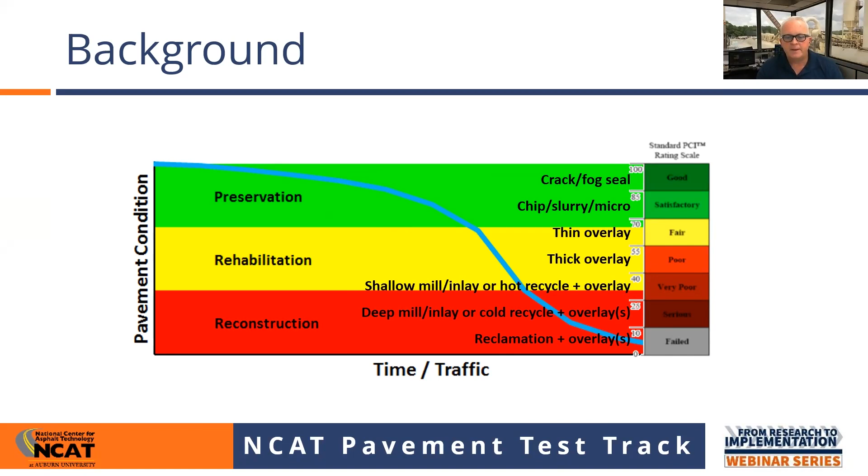And that's because that's the objective of the research we're doing. In many cases, when we're doing structural pavement test sections, sponsors want us to take them all the way out to failure. But in practice, what you want to do is catch pavements and keep them from falling too far down that curve, because the farther down you get, the more money you have to spend per mile or per square yard to maintain serviceability.

So when we talk about pavement preservation, really what you want to do is stay in the upper third to half of that curve. And the research we do is all about equipping you to select the alternatives so that you can achieve the lowest possible life cycle cost for your roadway network.

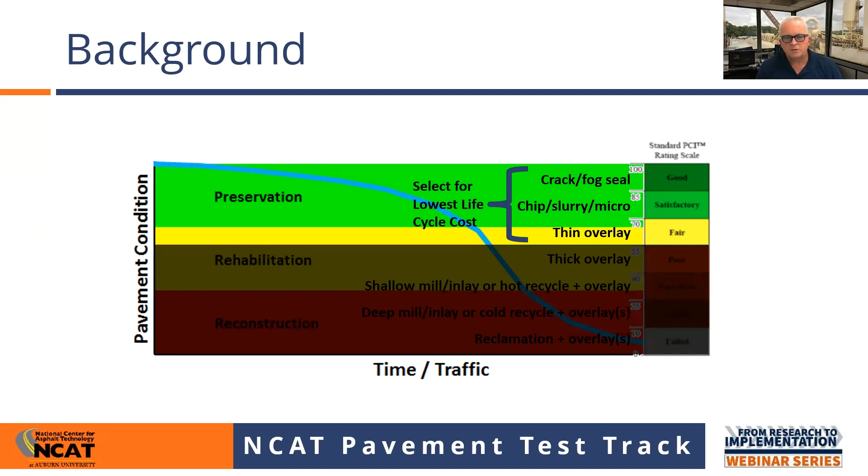So we always talk about safe and sustainable asphalt pavements at the lowest possible life cycle cost, and pavement preservation is a really important part of that.

So the need for this research, going back to 2010, 2011, was pretty great. If you looked at the resources available, and I'll pick on microsurfacing versus thin overlays because that's often a decision agencies and owners make - do I want to use one or the other - and if you looked at the research or reference material out there in the early to mid 2000s, you didn't have a lot of guidance on how long these were going to last when you start to evaluate your alternatives.

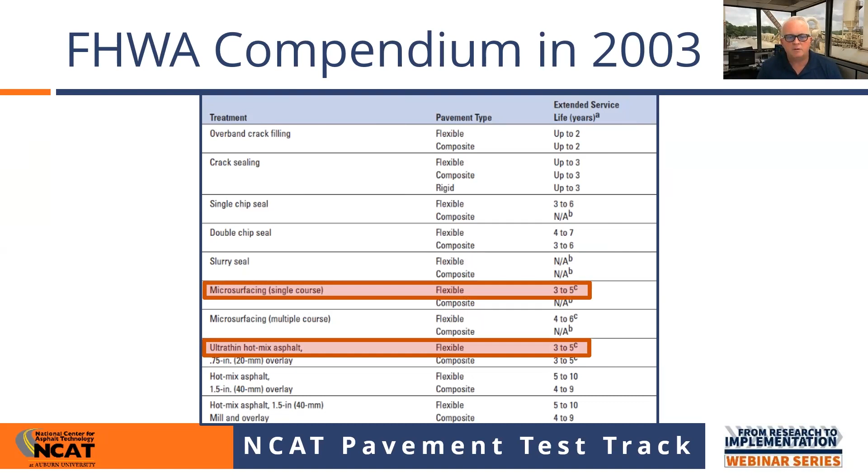The National Center for Pavement Preservation, back in the mid to late 2000s, had a table that was really useful, which they promoted in presentations, that related pavement condition index to different lengths of life you would expect from alternatives.

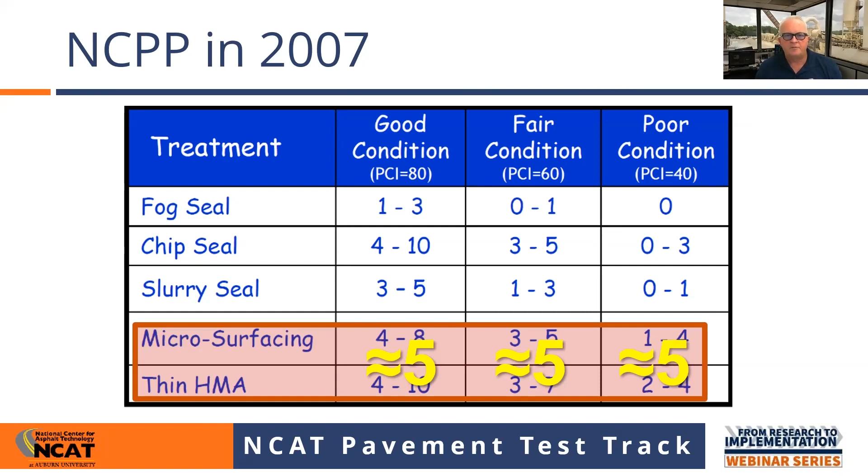And this is not ideal. What we know is that when we apply these different treatments to roads that are in good condition, they last a lot longer than if we apply them when they're in fair to poor condition. But quantifying that really is our challenge.

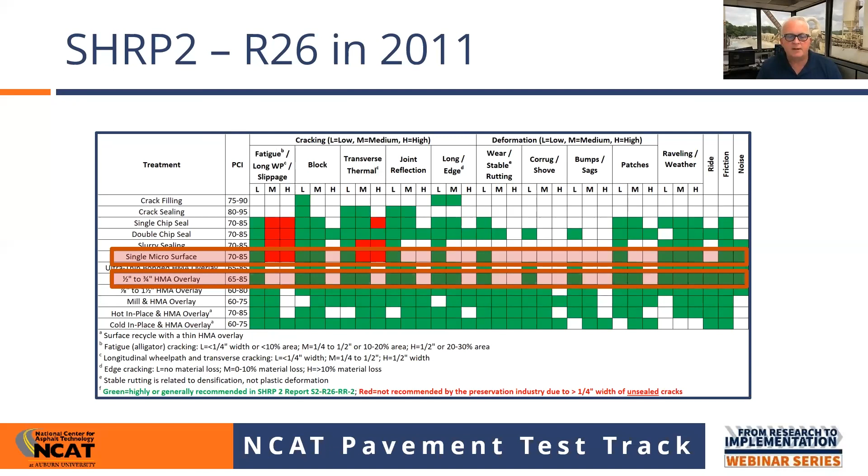The R26 document came out of SHRP2 in 2011, and it provided a little more guidance, but you still got a lot of green in that table, not really differentiating guidance on which to pick based on the PCI you have on your roadway. Essentially the only thing you can take from this table regarding microsurface versus thin overlay is that industry says don't put microsurface unless you have sealed cracks, if the cracks are more than a quarter inch - that's where the red comes from in that table. But again, there's no guidance provided that helps quantify how much life you're going to get based on the pretreatment condition of your roadway.

So in 2010, 2011, our director here, Dr. Randy West, directed me. He said we need to do this kind of research on the test track in conjunction with all our other research, but we also need to do some research with pavement preservation where we don't have accelerated traffic, and we don't have pavements near structural failure in many cases.

So we found Lee Road 159 back in 2011. We worked with the Lee County Commission and the Lee County engineer and got permission to use this roadway. We dissected it, looked at all the distresses on it, and laid out an experiment on Lee Road 159 that turned out to be groundbreaking and very important. What's unique about this roadway is that it's a dead-end access road to a quarry and an asphalt plant.

In the inbound lane you have empty trucks, and in the outbound lane you have loaded trucks. So there's a big difference in loading between inbound and outbound, a big difference in pretreatment condition inbound versus outbound, and a big difference in pretreatment condition by wheel path, because the road was widened decades ago. It turned out to be a treasure trove for data collection, because we had pavement surface area in pretreatment good, fair, and poor condition for all the different treatments that the states you see on the sign there, in partnership with FP2 and FHWA, decided to include on this roadway.

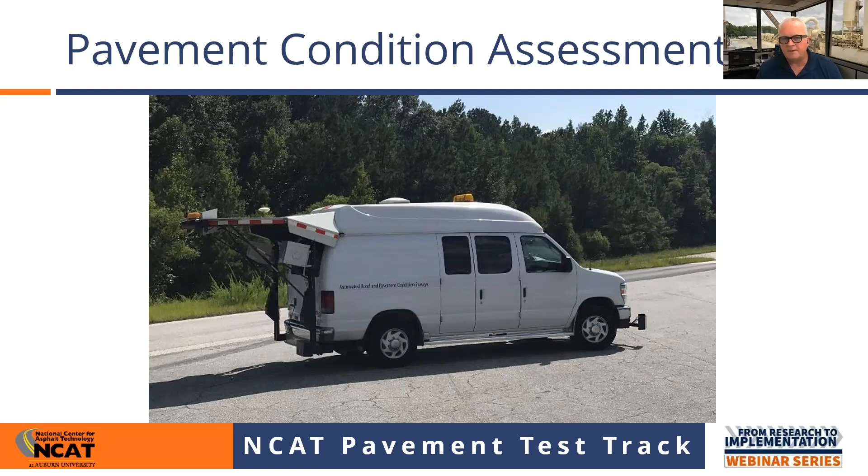I wanted to make a point I always emphasize when teaching pavement management, especially to smaller agencies. A lot of times you think this is how you have to do it, and if your budget doesn't allow it, you just can't. That's not true, because the performance curves Adriana is going to talk about, you can develop from just a windshield survey of your network. This 3D van is really high end, it does auto cracking and everything, giving you rutting, roughness, texture, and cracking, but you can do everything Adriana is going to talk about just with a windshield survey.

The other thing I wanted to emphasize is that we talk a lot about Lee Road 159, but that was really just our starting point. We built the test sections there in 2012, but in 2015 we took what we learned and built a bigger experiment on US 280. Lee Road 159 is about 5 minutes from the main NCAT office, and the US 280 test sections are about 5 minutes from the test track. They're both very convenient, with very different traffic levels, and we're seeing significant differences in performance because of those traffic levels.

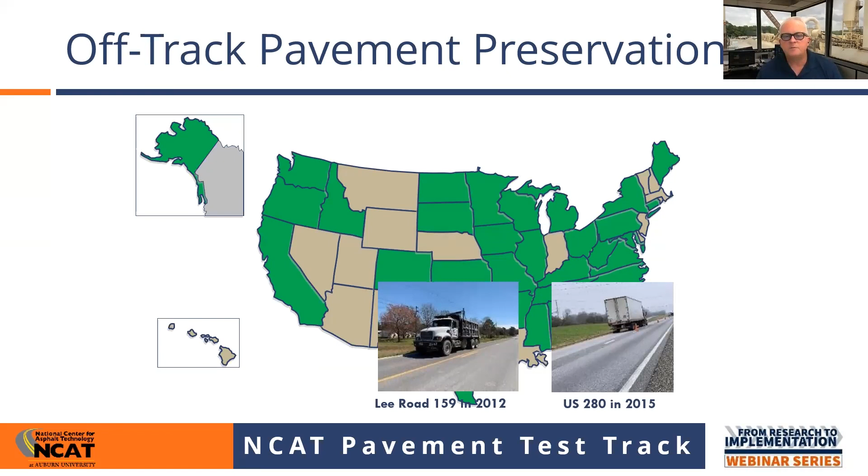That was great for the southern part of the United States. As part of our partnership with the Minnesota Road Research Project with Minnesota DOT, we worked with them to install the same types of test sections on County State Aid Highway 8 and US 169 in 2016 - very much the northern versions of Lee Road 159 and US 280. This was important because, as you can see on that US map, all the green states are impacted by research at NCAT, research at MnROAD, and the NCAT-MnROAD partnership.

The only thing we didn't have on Highway 8 and 169 was cold recycling, which was done on 159 and 280 down south. So on 70th Street in 2019, we were able to add that. So we got a huge test bed of really good information for hot climate and cold climate, with hot mix treatments as well as emulsion treatments, both hot and cold. With that as background, I'm going to hand off to Adriana, and she's going to get into the weeds here with what all this means to you in your practice.

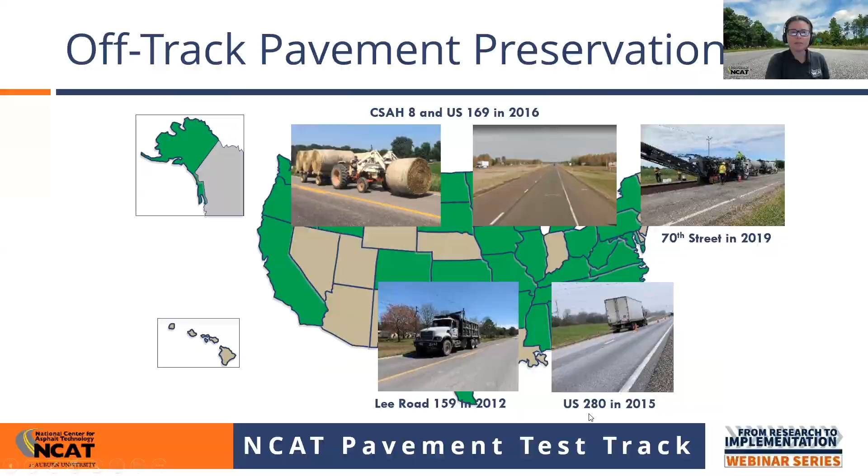Just to continue with Buzz's background, he's talked about preservation, and I think it's a given that we have known for a long time there are benefits to pavement preservation, but those benefits have not been well quantified. That goes back to what he was showing with the different tables, so we don't know exactly what to use when making our decisions.

We also know that performance from pavement preservation treated pavements depends on many factors: what treatment we're using, and the existing pavement condition, which is extremely critical to performance. We also have things like traffic level and climate conditions. All of that is what we're covering with our study - we've been able to take those variables and go a little further to get more detailed data that will give us a good expectation for the different conditions when we're doing our pavement preservation.

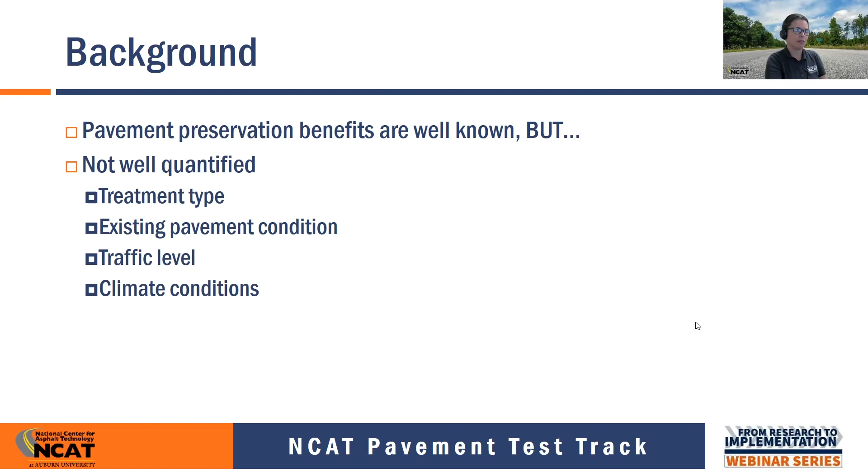So it all comes down to, again, you've probably heard this a million times: right treatment, right pavement, at the right time. If we get that combination, we should be able to get very good performance from our treatments.

Again, Buzz said it, we started with the Lee Road 159 study 10 years ago now. At this point, we've been able to add more sites to it. That's been a lot of data we've been able to compile and analyze over time, and that's what we're using to develop all of these curves.

I'm just going to show today some of the work we've been doing, focusing more on the process of how to use the curves rather than just giving you the results for individual treatments. But then I'll point you to where you can find the data to do the same thing for whatever conditions you're looking for.

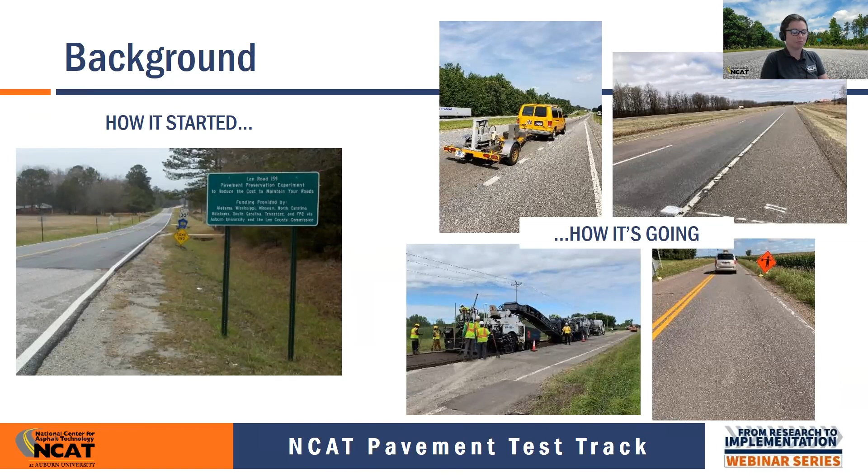Some background again: this is where all this information is coming from. Right now we are monitoring and analyzing 145 test sections altogether, combining everything we have in Alabama and Minnesota—low traffic, high traffic, all of that adds up to 145 test sections.

If we think of how much mileage that means, most of the sections are a tenth of a mile, but not all of them. We have some shorter sections on Lee Road, and the 70th Street sections are just short of a tenth of a mile. If we add up all the length, that comes to about 13 lane miles that we've been monitoring over time.

If we were to put that in terms of lane mile years—something typically used when talking about remaining service life, which I'll circle back to in a bit—if we take the length and the amount of time each section has been in service, that comes to about 81 lane mile years worth of data that we have right now.

So it's a lot of information. Thankfully, we've been able to do a lot with it, and it's been fun to take all of this and try to put it into something useful that hopefully will help you manage pavements better.

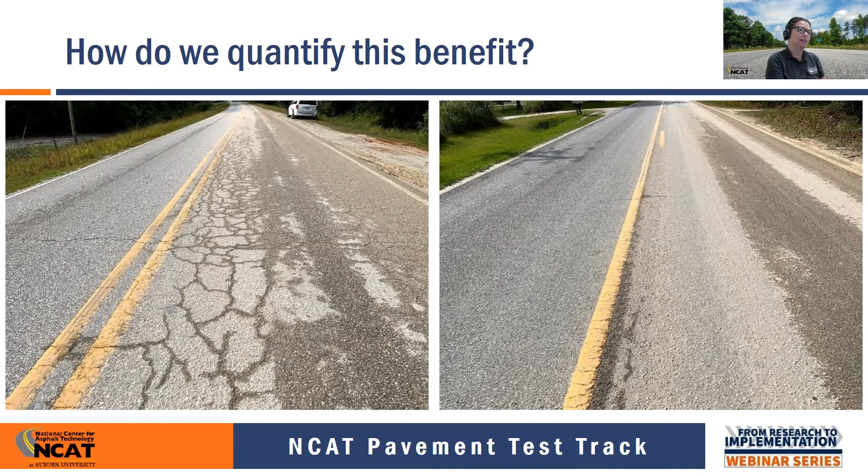So the big question is, how do we quantify this benefit that we've been seeing? In this slide, I'm showing on the left an untreated section from Lee Road 159—that's our control, nothing's been done to it. On the right side, we have a double chip seal section, again from Lee Road 159. Ten years ago, one was untreated, the other got the treatment, and we can definitely see that benefit we often talk about. But how do we quantify that? How do we put that in numbers and use it for pavement management purposes?

So there are two things we've been looking at: one is life extension and the other is condition improvement. When we talk about life extension, we want to say, how much more time will that pavement take to reach a certain threshold?

What we've been doing in this case is setting that threshold as whatever defines the poor condition category. We use the MAP21 performance indicators a lot, because having so many sponsors from different states makes it challenging to find something they all have in common. Every state has their own way of quantifying pavement condition, but everyone knows MAP21, so that was the common language everyone spoke, and we've been using that to quantify those benefits.

If we think about cracking, this is probably the most straightforward indicator we can use. It's easy to see, easy to measure, easy to keep track of and do quality control on that data, and it's often what we see change the most. There's a lot of work we've done around cracking, but it's certainly not the only thing you could focus on. I'm going to show you some examples right now.

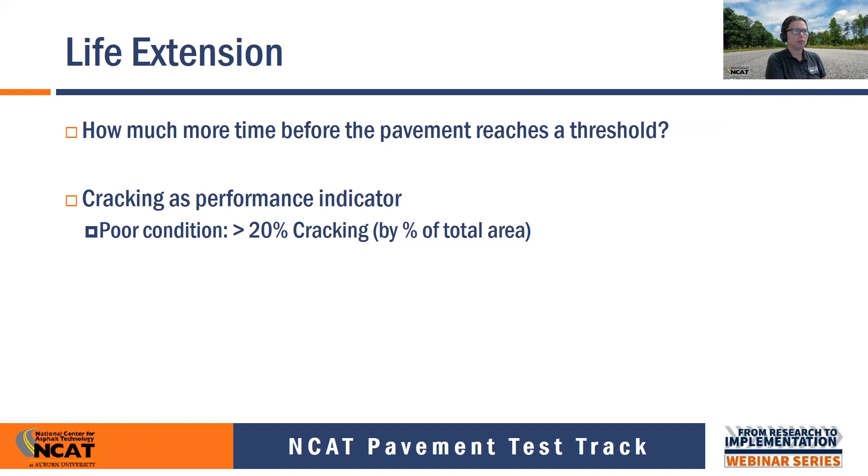We use 20% cracking by percent of total area. This is a little different from what we do with MAP21, because we're not only considering the wheel paths, we're considering the whole area, but it's close, since cracking is often concentrated within the wheel paths.

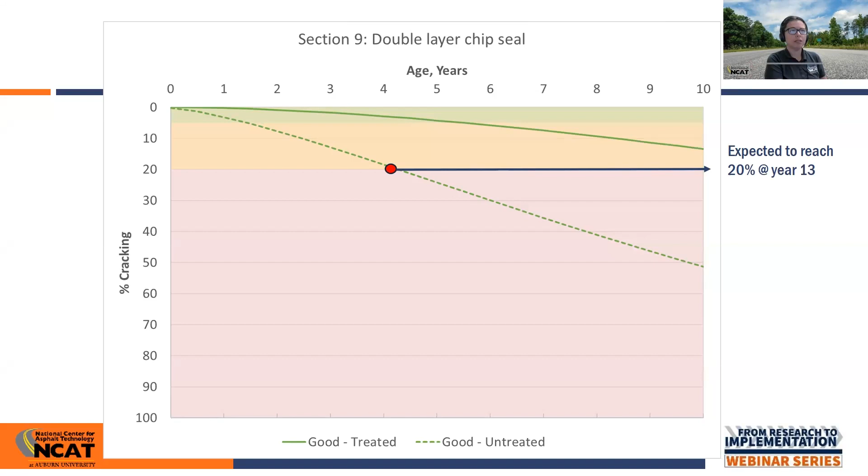So to quantify that life extending benefit, we just take the difference between those two curves. The 13 years when the treated pavement is going to reach that point, minus the 4, which is the year at which the control section reached that point, gives us a life extending benefit of 9 years for that double layer chip seal.

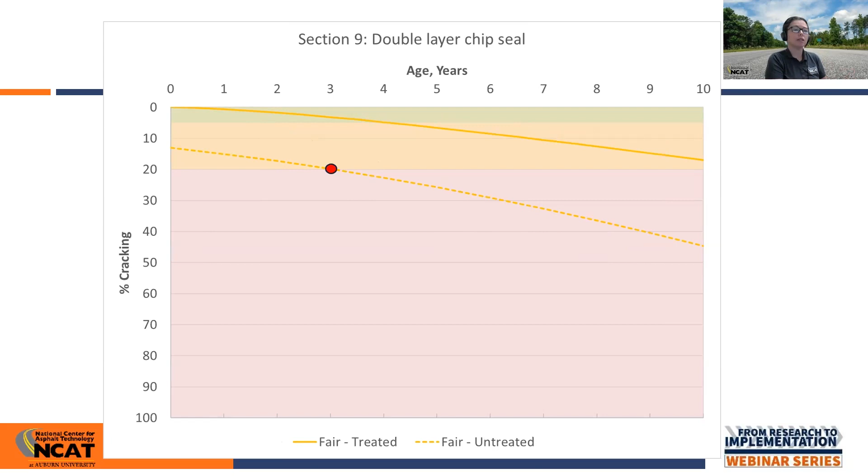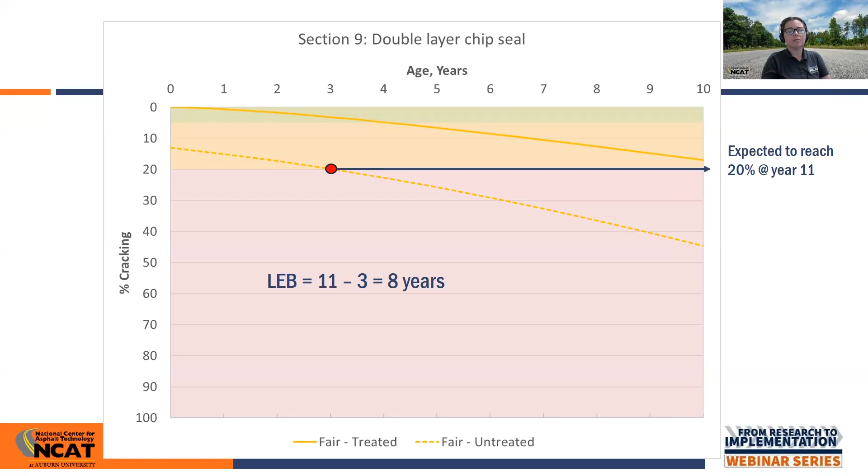If we get to the pavement when it's in the fair condition category, we just do the same process. In this case, at about year 3 is where we'll be in poor condition if our pavement was in the fair condition category to begin with, which is between 5 and 20% cracking. If we look for our treated pavement, we're expected to reach that point at year 11. Again, we take the difference between those two, and now we have 8 years of life extending benefit, slightly less than if we treated that pavement when it was still good.

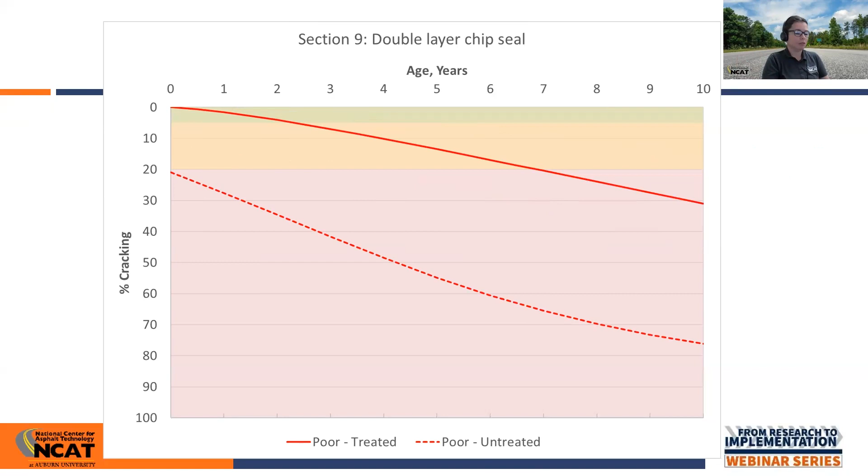Now, if we go to a pavement that started out in the poor condition category, the life extending benefit is just whatever time it took for that treated pavement to reach the threshold, since it was already poor. So we'll just look at the point here, it's around year 7. So now we have reduced our life extending benefit to 7 years. It worked out in this example that it seems almost academic because we just got 9, 8, and 7. It doesn't always work that way, but this was a nice one to illustrate that point.

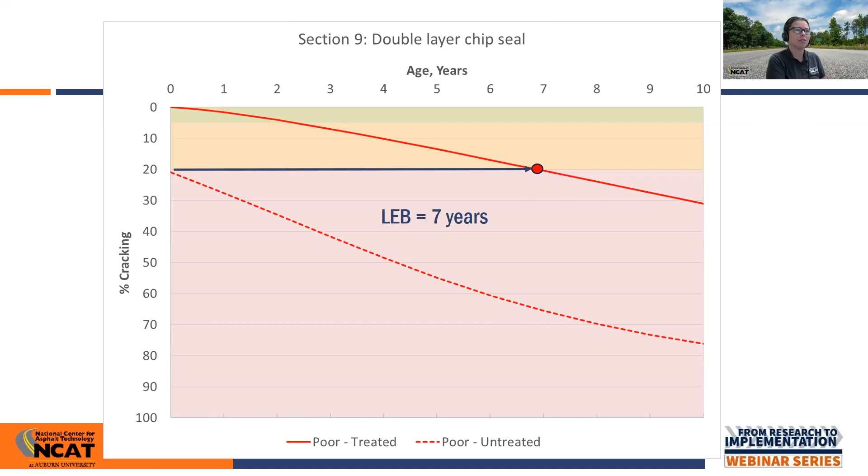Now, how does that affect our decisions? Why is it important to be as detailed as possible? Well, let's assume we have 10 lane miles that we need to treat, and let's think about remaining service life and how many lane mile years we're adding if we're treating the pavement in the different condition categories.

So if we took that pavement and treated it when it was in good condition, we multiply the 10 lane miles by the 9 years of life extending benefit, and we're adding to our network 90 lane mile years that we have gained.

If we did it in the fair condition, now it's 10 lane miles times 8 years, so that's 80 lane mile years. Same thing if we're doing poor condition category, now we're down to 70 lane mile years gained. The reason this is important is because cost is going to be about the same no matter what. If anything, it might cost you more to treat the pavement when it's in poor condition because of the surface prep you have to do. So assuming the same unit cost, would you rather have 90 lane mile years added to your network, or 70? It does make a difference.

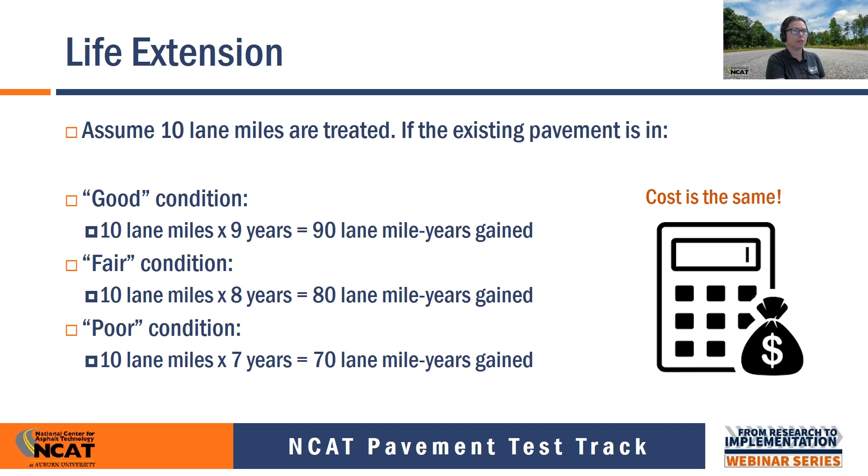Another thing I wanted to point out: we saw the life extending benefit, and it doesn't seem like much going from 7 to 9. It seems like a narrow range, it just varies by 1 year, but it does make a difference, like I showed in that previous slide.

One thing I also wanted to point out is the time it took for those treated pavements to reach the poor condition category. So maybe the life extending benefit doesn't change too much, but let's also think about the performance period when that pavement's going to be below the poor threshold. If we're in the good condition category, we'll have good to fair performance for 13 years before reaching an undesired level of service. But if we're in the poor condition category, that's almost cut in half. So again, we have to look at both sides to make a decision.

Are we planning on doing something else to that pavement within or beyond those 7 years? Maybe we use this as a band-aid, or are we looking more into the future where we want to keep that level of service and good performance for a longer time?

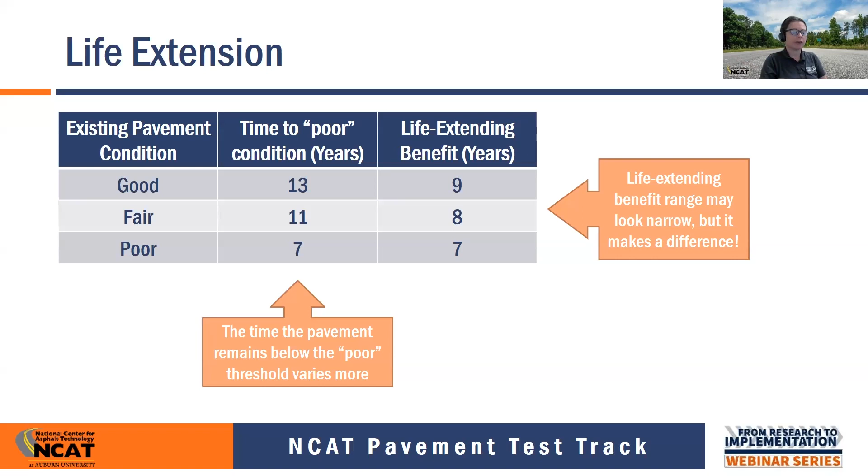I also mentioned the condition improvement benefit. In this case we were looking first at the difference between those curves horizontally. Now let's look at it vertically, to see how much less distress we see if we treat the pavement, the difference between those curves. There are different things we may see here, one or several of these bullet points.

We may see an immediate benefit, what we call the performance jump, right after we do our treatment application, an improvement in that performance indicator. It could be that we see a sustained benefit over time, or it may be that we have a different deterioration rate for a treated pavement versus an untreated pavement. So it could be one or a combination of these situations.

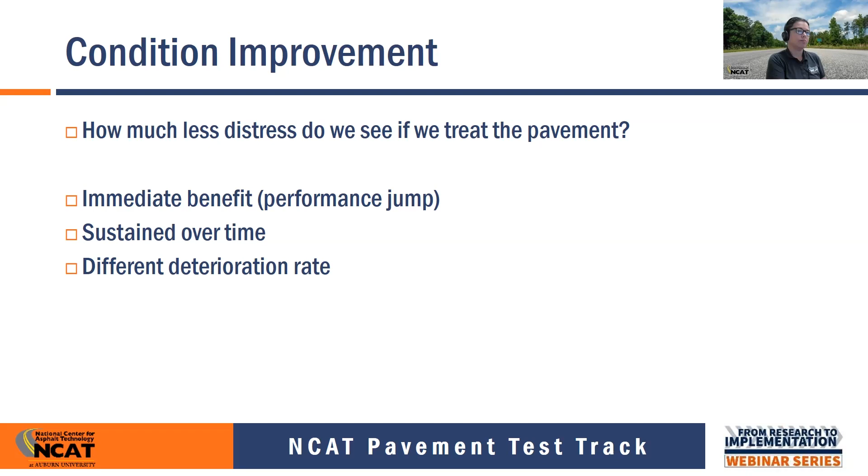Going back to our double layer chip seal example, one thing I also wanted to point out: if we have a pavement that's in good condition, maybe that condition improvement benefit won't be so obvious in the beginning, because the pavement's already good. There's only so much more you can do to improve the condition of this pavement.

But there comes a point where you can really start to see that preservation treatment pay off. We can take the difference between the two curves and see how much less cracking we will have for our treatment. Let's say in year 5, our treated pavement is still in the good condition category, but our untreated pavement is already in the poor condition category. That definitely makes a difference. So even though we don't see much condition improvement benefit in the beginning, later on it becomes really evident that when we apply pavement preservation, we're definitely going to get better results.

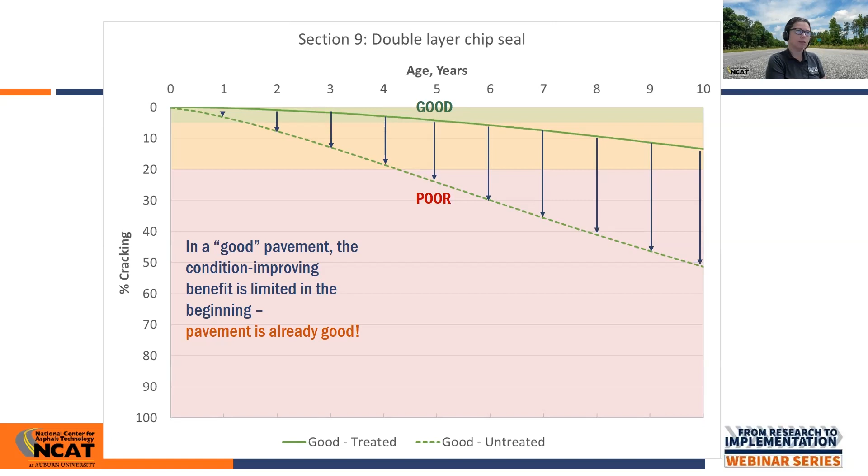Now if we have fair or poor pavements, maybe we have curves that are almost parallel, so we could express this as an average condition improvement. We take every year, look at the differences, and just take an average. That's one way to visualize it. In this case we have an average crack reduction of around 20%. So if you took a pavement in fair condition category and applied the double chip seal, on average you're going to have 20% less cracking each year for your treated pavement.

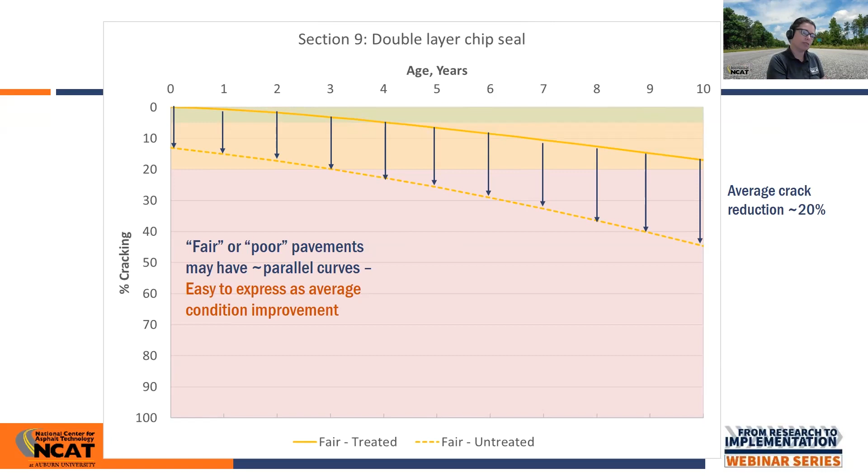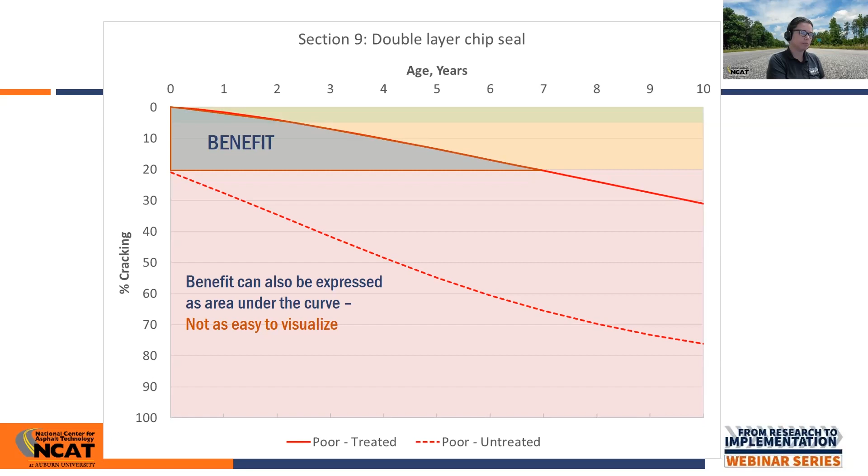So that was for cracking, but what about other performance indicators? One thing we've learned is that depending on conditions, other things may be more relevant. A good example is the Minnesota sections, our cold weather locations. They rely heavily on IRI for pavement management decisions, and we've definitely seen IRI being a bigger factor in some cases than cracking.

So we can take the same type of logic and apply it to IRI, get our IRI curves, and calculate that life extending benefit the same way. In this case, our condition threshold will be 170 inches per mile, which is the threshold for the MAP-21 criteria to define a pavement as in poor condition.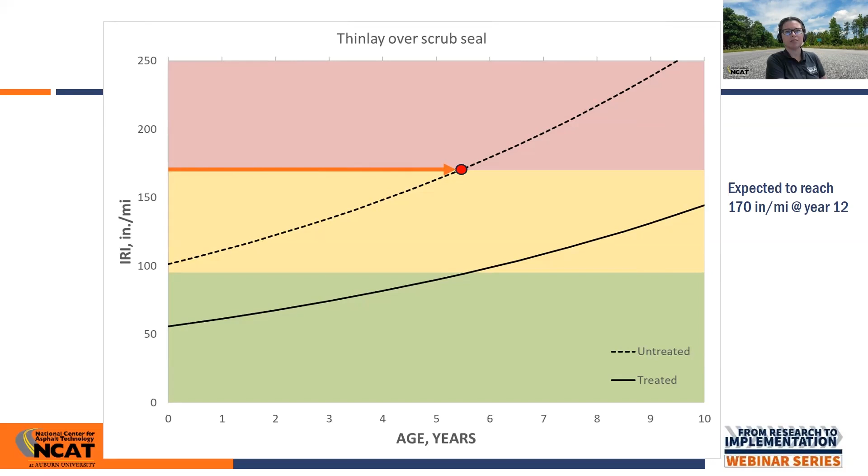In this case, if we don't do anything to that pavement, at around year five we'll reach that poor condition threshold. For our treated pavement, that's expected to happen at around year 12. So once again, if we take that difference, we have more than 6 years of life extending benefit in terms of IRI for that pavement.

Another thing evident here is the immediate improvement in IRI as a result of putting down this combination treatment. In this case, we were able to lower that roughness, and now we have a difference in our IRI immediately after treatment of 45 inches per mile. So that's another short-term or immediate benefit we want to see.

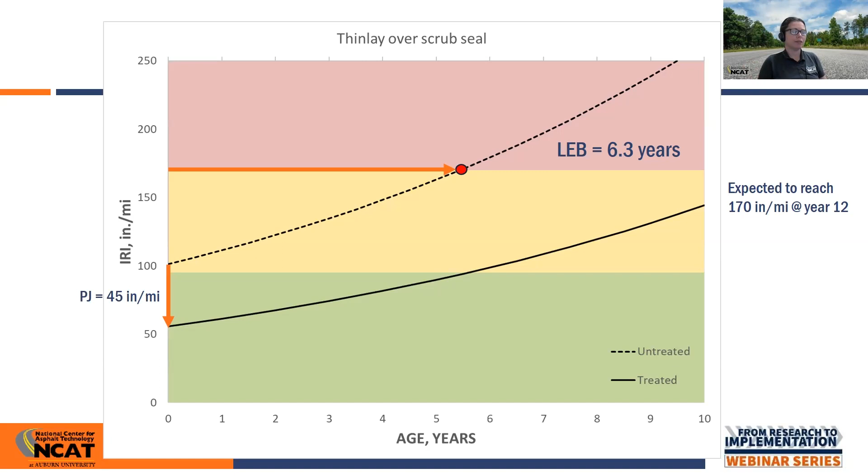In some cases, maybe we don't see that performance jump. This is a single chip seal, again from our Minnesota sections. You can see immediately after treatment we actually made it a little worse, the IRI went up by a few points. But the important thing is that over time, we were able to lower the deterioration rate.

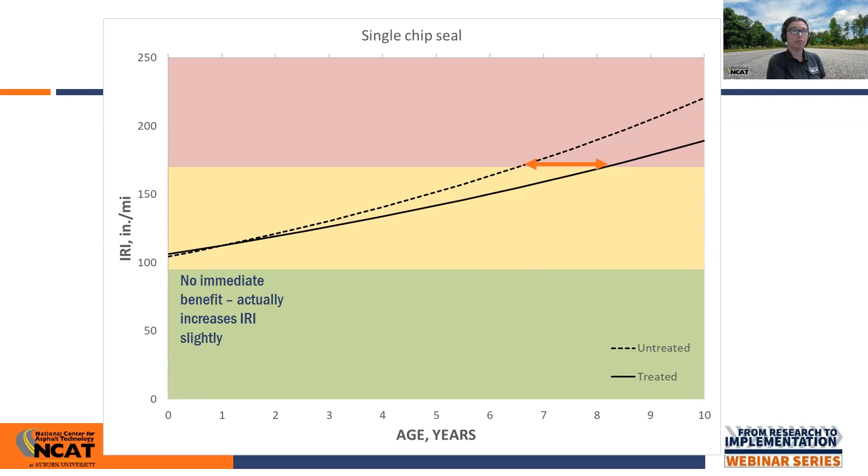So the real benefit comes later on, as the difference when the pavement reaches that poor condition threshold. We reduced that deterioration rate, and that resulted in a benefit of 1.6 years of life extension. Now that may not sound like much, but let's think about the treatment we chose. This is a single chip seal. If you're having IRI problems, that's probably not your go-to treatment. But if you put it down for another reason and you're getting this as a bonus, I think that's an important thing to point out.

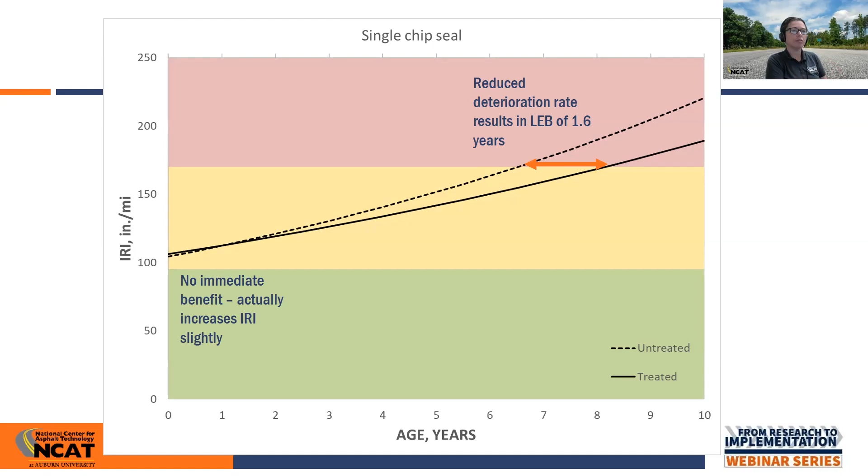So we are seeing benefits again from the treatments, even if they might not be much. If you want to see more on IRI specifically, we have a paper on pavements with thin overlays for the Minnesota sections, where we've done all of this analysis. You can look at the tables of the life extending benefit. In this case we're focused only on the thin overlays, but we've been working with different treatments too, and that's something we'll be publishing in the future.

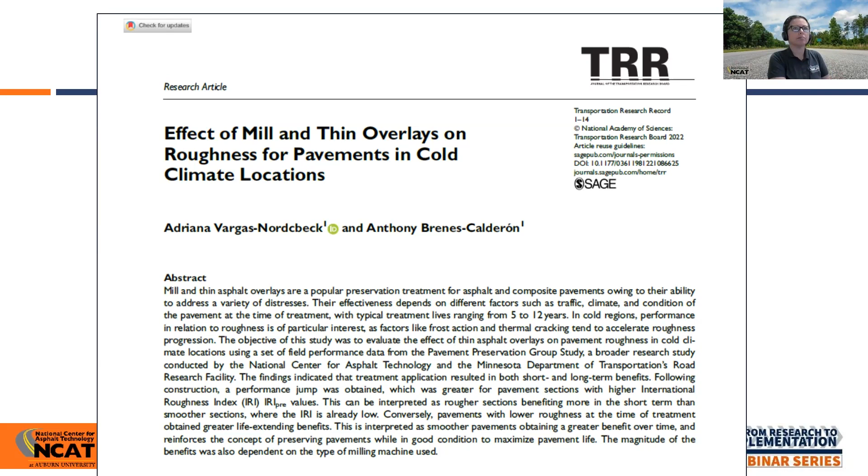All right, so this brings me to the demo I wanted to show with the online tool. I've shown you the process on how we can use the data to get those benefits, and now I'm going to show you where you can find the data.

We've been developing an online tool on NCAT's website. It's live and accessible to anyone who wants to play with it. Right now, we only have performance data for the Lee Road 159 sections, which correspond to low traffic and warm climate.

I must make it clear that this is all preliminary data. It's subject to change, we're constantly updating, and the curve is going to change as we add more data. It may vary slightly as a fitted curve, but right now I think it's a good starting point.

So let me switch quickly here, one moment. I guess I'm going to start from the beginning so you can see how to get there.

So if you go to NCAT's website, ncat.us, you'll find a pavement preservation tab at the top. If you click on it, it's where you'll get everything that relates to our pavement preservation research. If you go to the menu on the left side and choose Observed Performance, that's where you can load our tool.

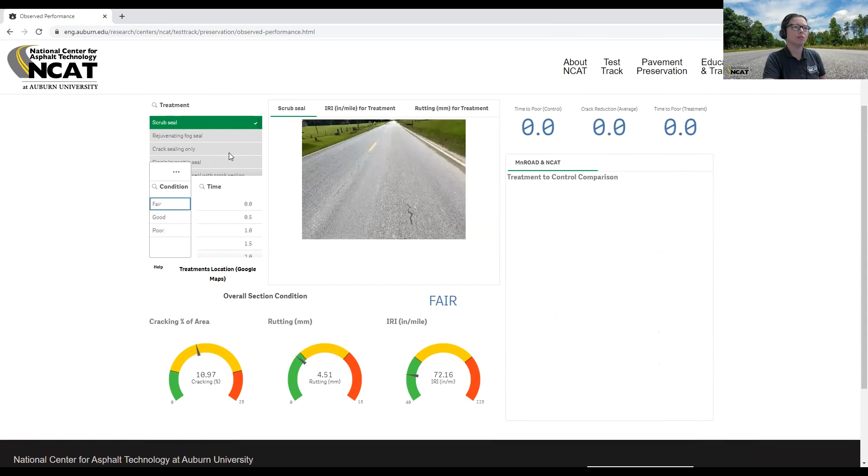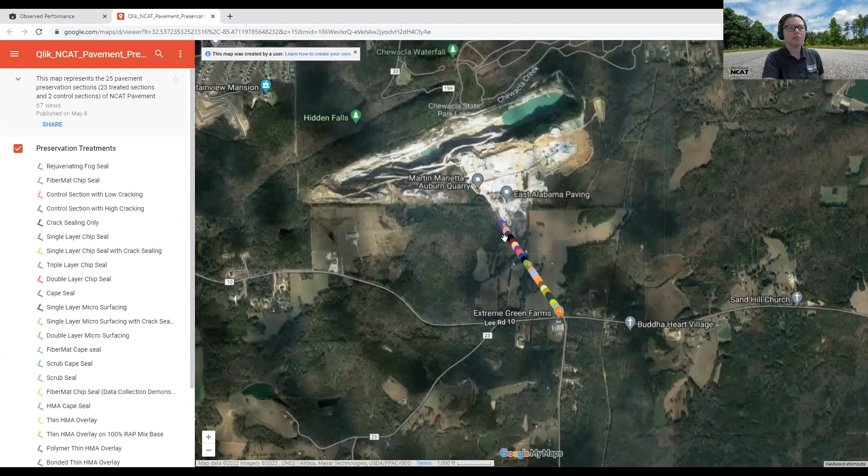Another thing I wanted to show quickly here is if you click on the treatment location, it will give you a map of where Lee Road is located and the different sections along the length of the project.

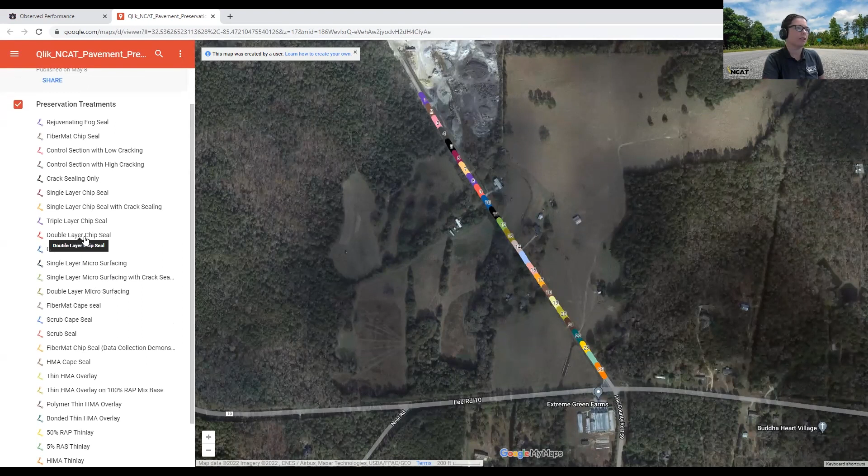And if you want to know more on construction - so if you're curious to see, well, that double layer chip seal, I really want to see what you used - it will give you some construction information.

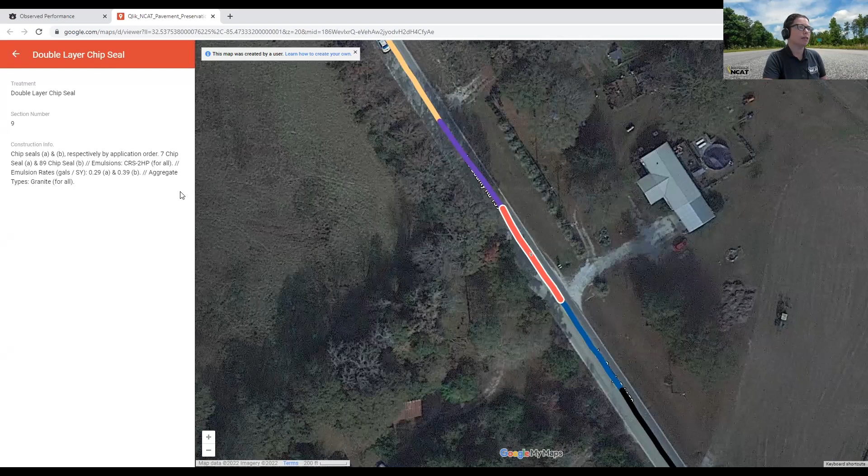So what the chip size was, the emulsions that were used, emulsion rates, aggregate type - if you wanted to get those type of details, you can get to those. This is something you can just get to, it's not password protected, you can just navigate through it and play with it. Let us know your feedback if you think there's something we can improve. We're constantly trying to update and make it better.

Another thing before I pass it back to Buzz, going back to this menu here, we have the pavement preservation resources, and this is just a list and links to all the papers that we have published. So if there's anything you want to look more into detail, you can get to it from here. And I think that's about it for me.

Thanks, Adriana. We appreciate that, and hopefully y'all found that to be some really, really useful and relevant information. One of the questions in the chat box, Adriana, was if you can put a link to that, a direct link to the web tool in there to share with everybody. So you may want to take a look at that while I'm finishing this up here.

So to kind of pull all this together and give y'all some implementation takeaways - I think it's important to note that we've had what I would consider to be a positive performance experience from all the treatments that we've used. Anywhere we've applied any of these treatments, we've not seen something that's blown out on us or has not met our expectations.

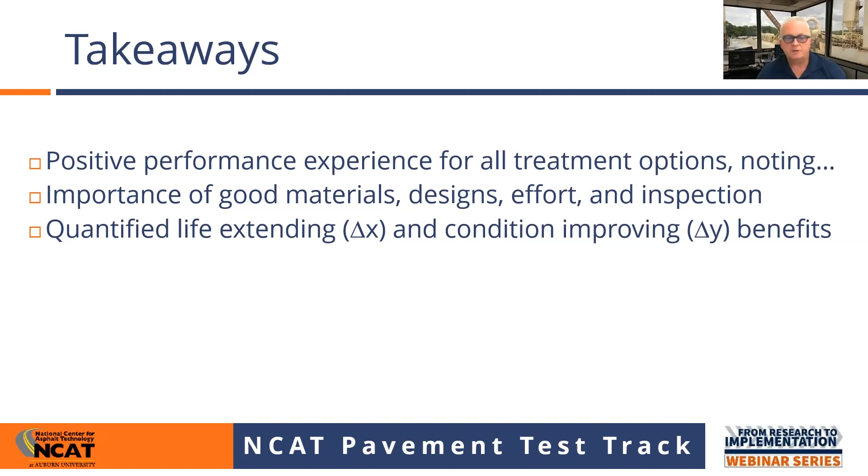As you saw in Adriana's presentation, I think this experiment continues to do a really good job as we monitor these test sections into the future and quantify the delta X and the delta Y in the pavement life cycle curve that we started the presentation with. The life-extending benefit is the shift in the X axis, and the condition-improving benefit is going to be the shift in the Y axis.

I'm really excited about this web tool. We started the experiment out with just kind of static PDF reports, and the web tool has been an outstanding innovation that Adriana has worked really hard to develop. It's really nice to be able to dive into that and do your own queries and compare the data that you want to compare.

I always try to stress that pavement condition assessments can range from really simple windshield surveys and a 1 to 10 ranking to very detailed pavement condition assessments with 3D vans or manual surveys. That's what we were doing when I started with Alabama DOT - manual surveys. But the important thing is if you're a smaller agency maybe and you're not already doing this, you've got to start.

You've got to get the data points that Adriana showed on those curves. You've got to begin to understand what are the changing conditions of all the roads that are in your infrastructure that you're managing, so that you can use the data that we're generating to support your decision-making process.

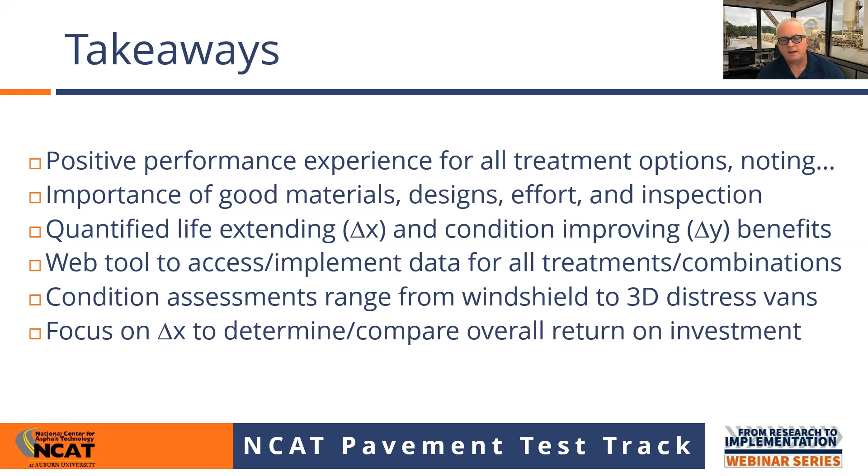So if you think about the delta X and the delta Y, the X axis shift, you can use that to compare overall return on investment for the treatments that you're evaluating or considering. And then you can look at a specific point in time, like a budget cycle, and say, okay, what's my Y offset? What's my delta Y? What kind of shift am I getting as a result of the investment I'm making? So hopefully in this webinar, you've got a good feel for how you can use the data that's being generated.

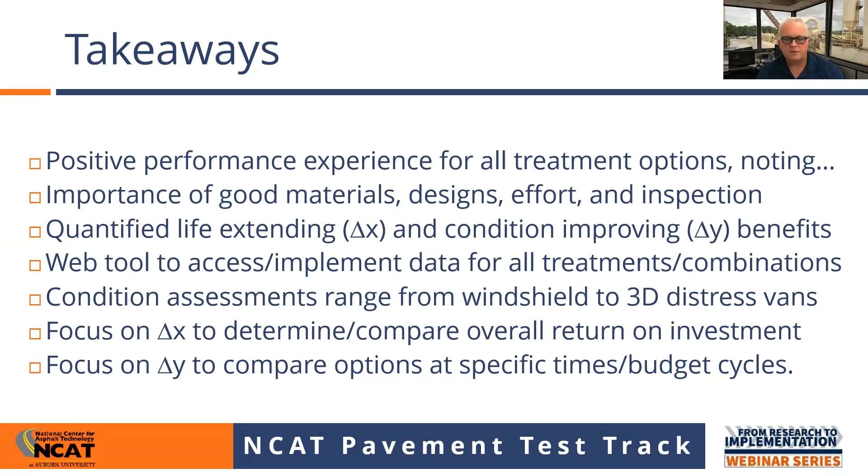I saw a lot of names, participant names from state agencies that are financial partners supporting this research. And it's all about implementation so that we can provide a good return on the research investment that all of these states are making. So that's all I've got, Travis, and I'm going to stop my share and hand back off to you.

All right, that sounds good. We've had a couple questions come in, and I think it's always great when we have that opportunity to answer some of those. Adriana, I think this first one would be great for you. It says, what happens if the life extending benefit is reached? Do you treat the pavement again, mill and fill, etc. I think we want to clarify that the pre-treated condition is maybe more where we're headed with that, but I'd like to let you answer that and have that discussion.

Sure. So that's definitely going to depend on each agency's policies. It's possible that we apply another treatment, but we're now going to be in the poor condition threshold, so the treatment options we have to be effective are going to be more limited. It's possible you're looking more into the rehab side of things. If you're a little more proactive and don't wait until you reach that threshold, you may keep doing preservation over and over, keeping that level of service in the fair or good range. So again, it's sort of to help you see into the future and plan ahead, but it's all going to be dependent on everyone's policies, I guess.